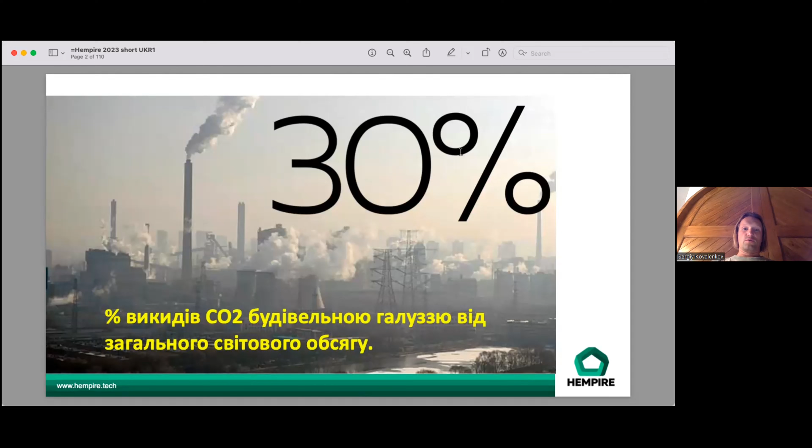Let me show you my next slide. 30% of CO2 exhausts are the responsibility of the construction industry. And this is actually the bottom line. Modern analysis says it is averaging 40. So you can say 40% of CO2 comes from construction. So the construction industry is very conservative and very harmful for our environment.

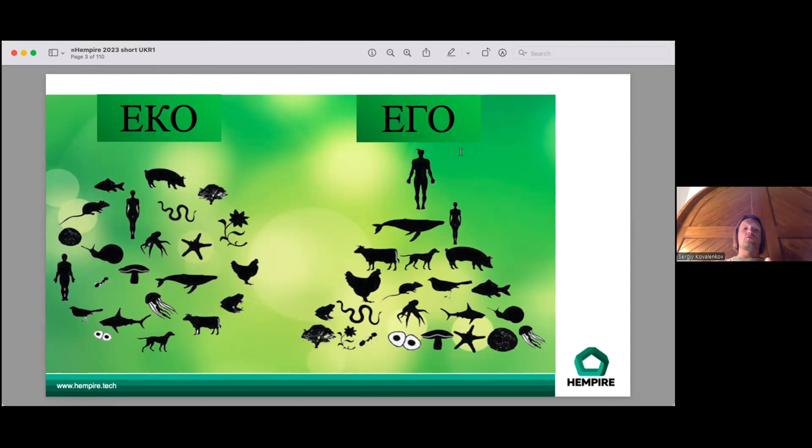We have a lot of problems here, not even challenges, but problems, because the person puts himself and herself on top of everything else that is alive on our planet. But this is not good for development. And in all textbooks on economics, all natural resources are shown exactly as resources, like timber in tons or oil in barrels. But you must understand that these resources are going to have an effect on the whole planet.

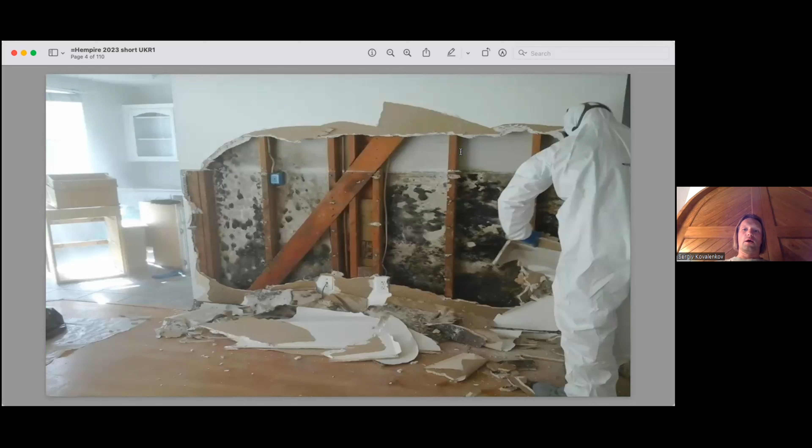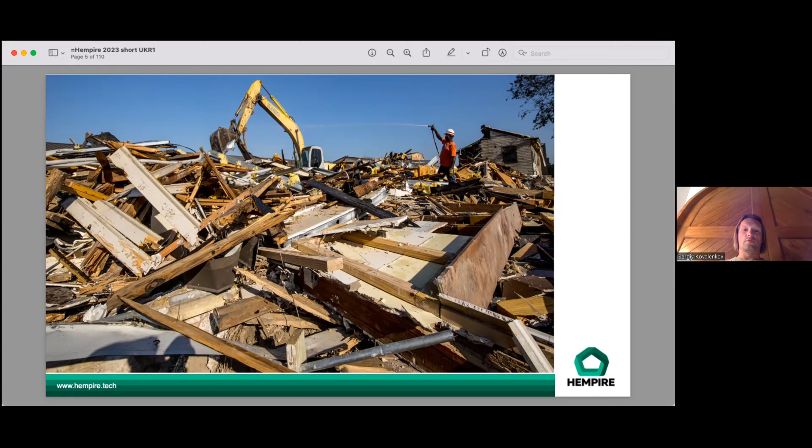So now we have so many materials which are easy to install and they are rather cheap. You see them here, but you need to understand that sometimes the planet suffers when we use cheap materials. 15% of all the construction materials do not comply with any regulations. Even the latest kind of materials brought to the construction site will be used only to the amount of 85%.

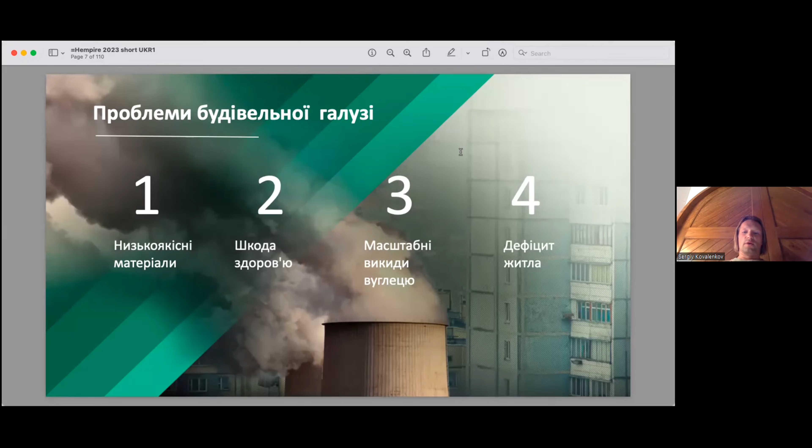15% will be simply thrown away, and the construction industry creates landfills, and we are producing low quality materials which are harmful for health and harmful for the whole planet. And this is the never-ending cycle. We are doing it again and again, and somehow we cannot jump off it. And what is the solution that we are proposing?

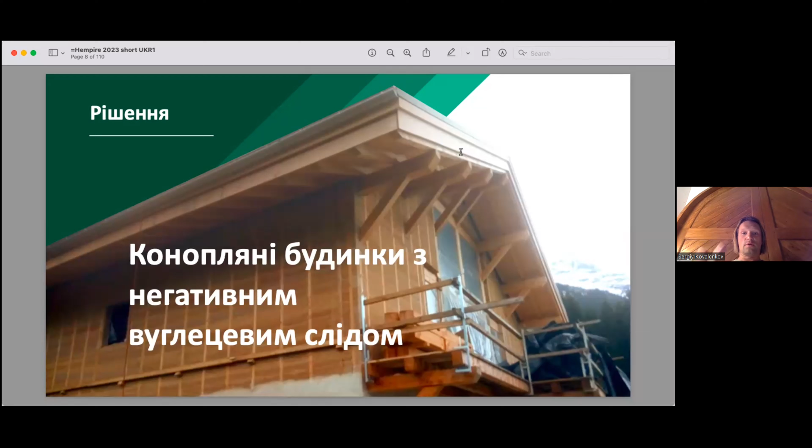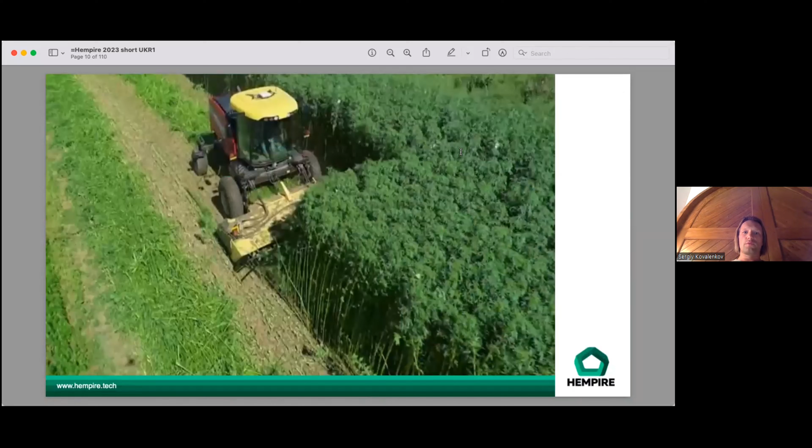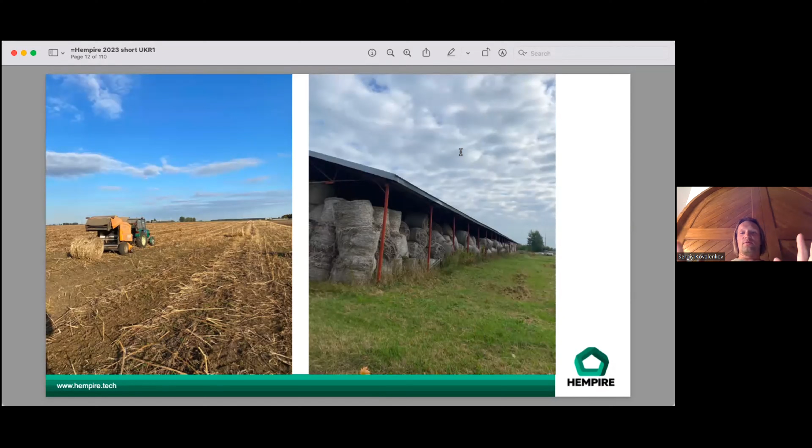We propose to build houses using isolation materials with negative carbon imprint, and I'm going to tell you what it is about. This is our hemp farm. This is how technical hemp is being produced. This is an agricultural crop which is grown like sunflower. Then it is harvested from the fields and taken to the facility.

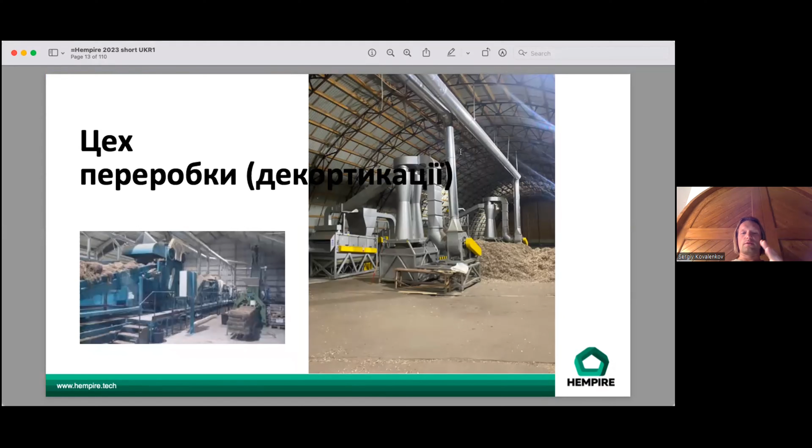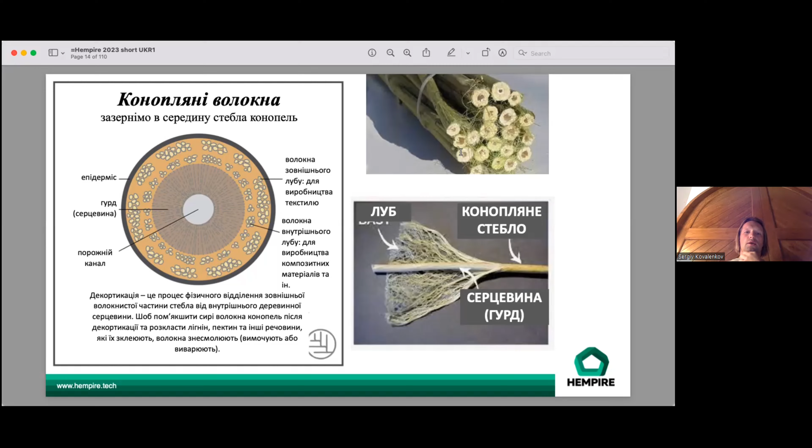And this is how it is being processed, decorticated. This stem is being processed to get two things from it. One is the fiber, which can be used to produce bioplastics, clothes, paper. And the inner part of the stem is very much like timber, and it is very porous too. And so we're using it as insulation material.

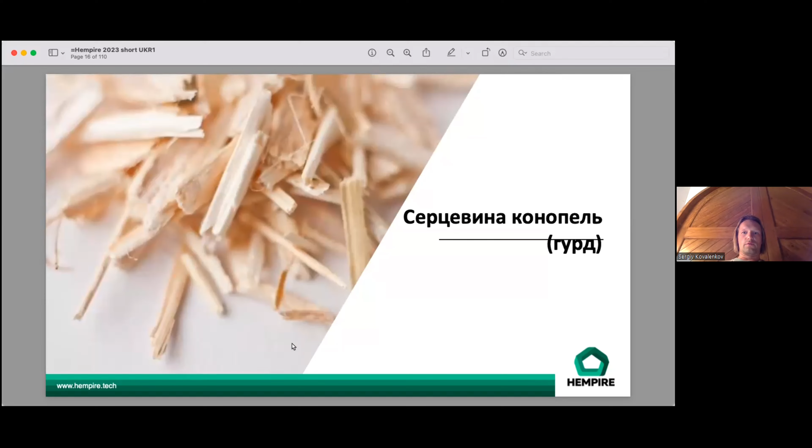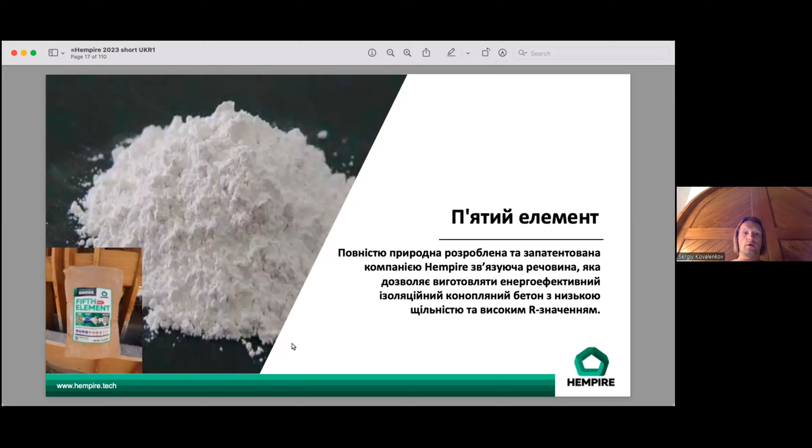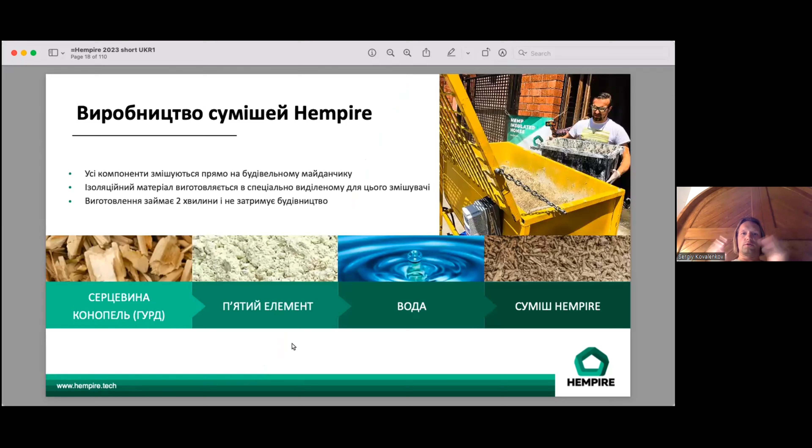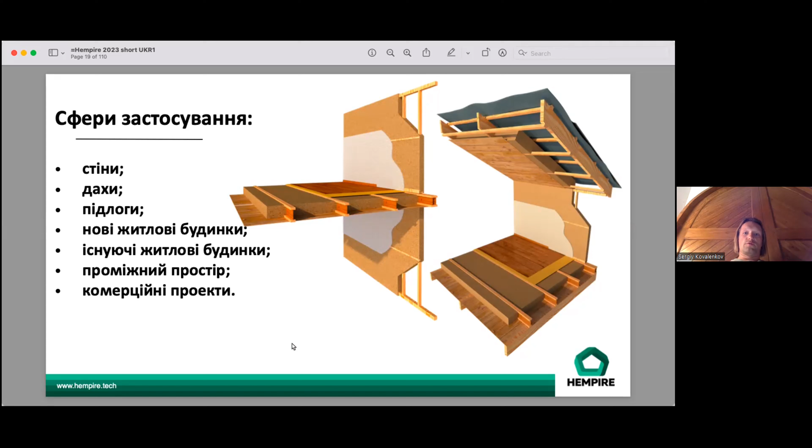We have used a construction lime to produce a binder, and this is our fifth element. So our mixture includes the hemp hurds, the fifth element, as we call it, the binder, and water. And the three elements are put together at the construction site, and this material can be used to build anything: external walls, internal walls, the roof. So whatever you need in a house can be built of it.

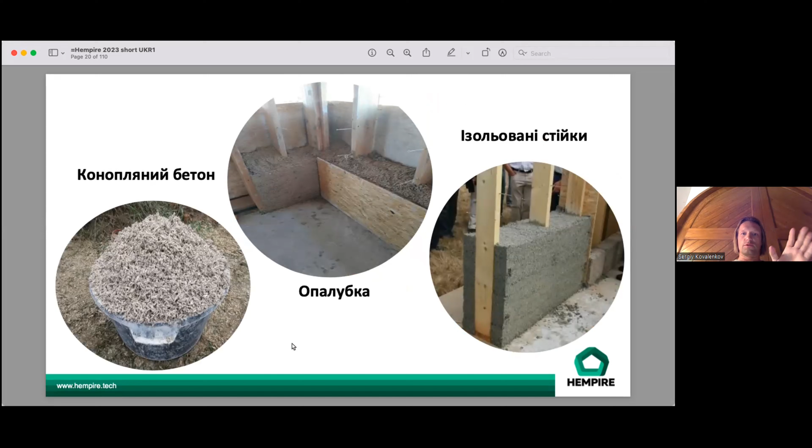So how this mixture, this insulation material works, hempcrete we call it. We make formwork, and then we fill it with hempcrete, and we can remove the formwork 1 minute after we finish pressing the hempcrete into it. And our hempcrete starts solidifying at once by absorbing CO2 from the atmosphere. When lime is mixed with water, it starts absorbing CO2 and it turns into limestone.

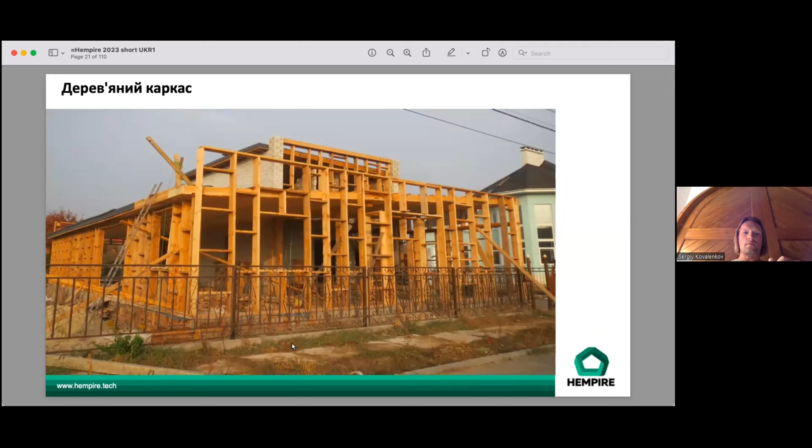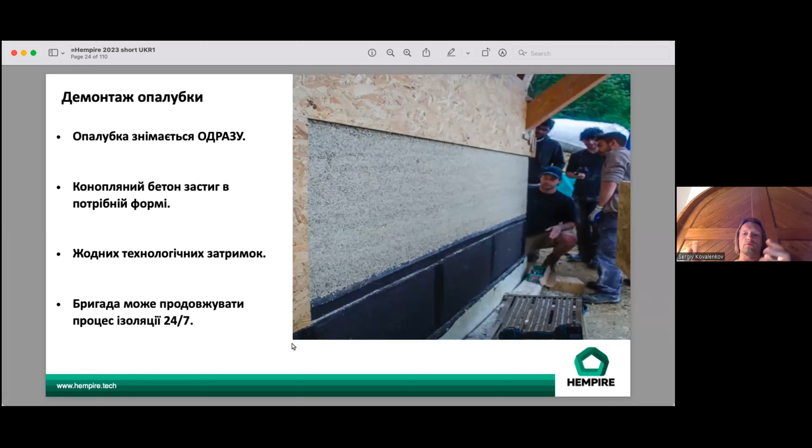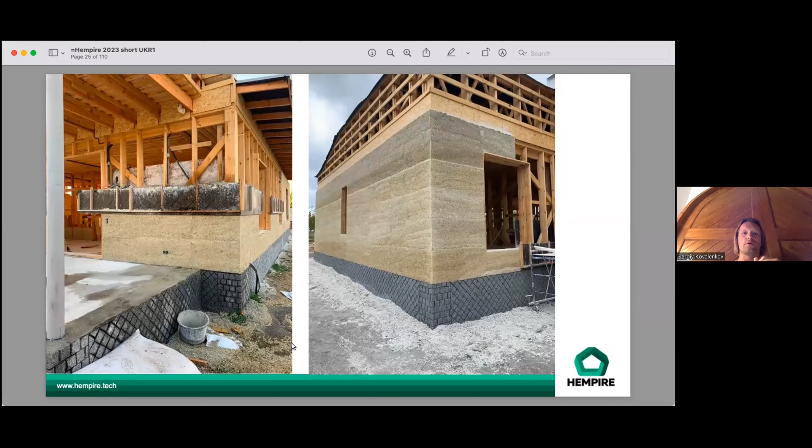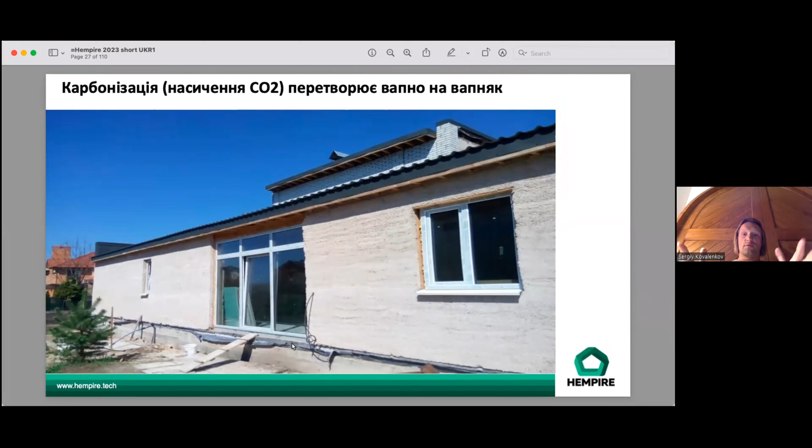This is how it looks. So we press it together very quickly and we get a material which is instant setting, and it keeps its shape very nicely, and we can use it to isolate any surface. We can select the necessary depth of the insulation material depending upon the climate, and we can isolate the whole building using this material, and it is a biodegradable material. We are using only Ukrainian produced

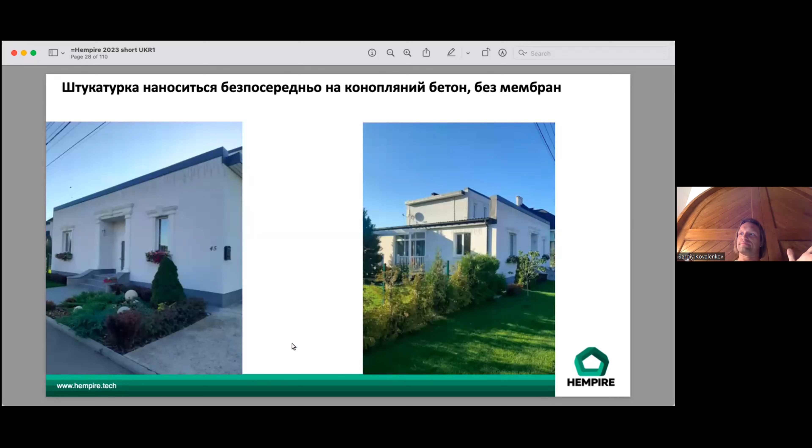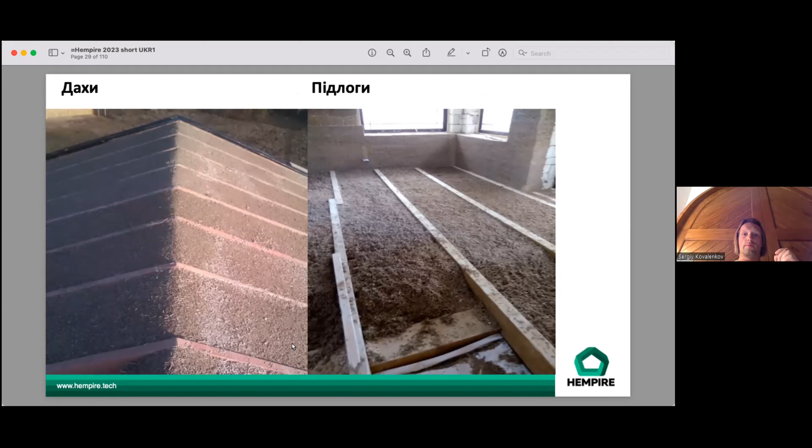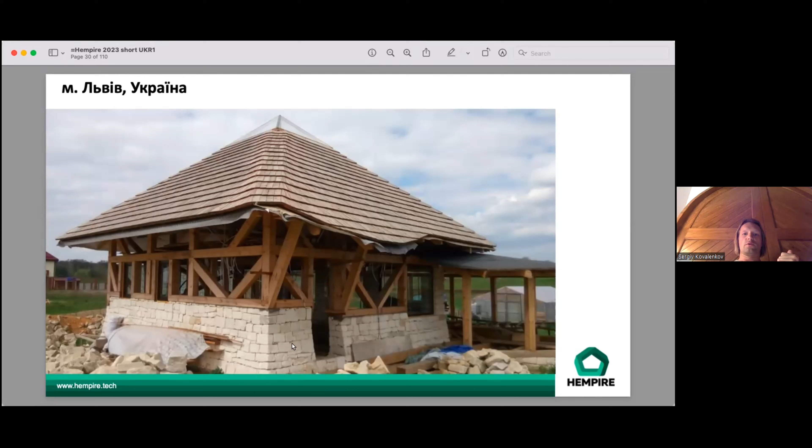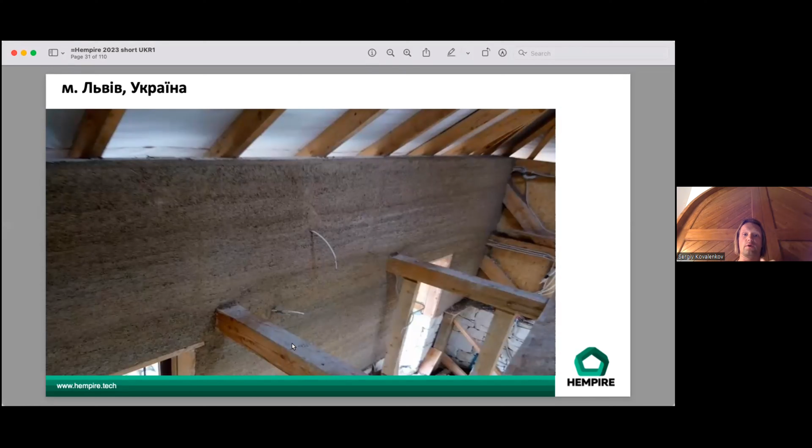raw materials. We can plaster this material on both sides, and if this material is used inside, once again, it is biodegradable, it is absolutely ecological, and it looks really cool, because 1 hectare of technical hemp can absorb during 4 months of growth up to 15 tons of CO2. So when we produce something of hemp, we are doing a very good job because hemp absorbs CO2 very nicely, so it reduces the carbon print of the building industry very efficiently.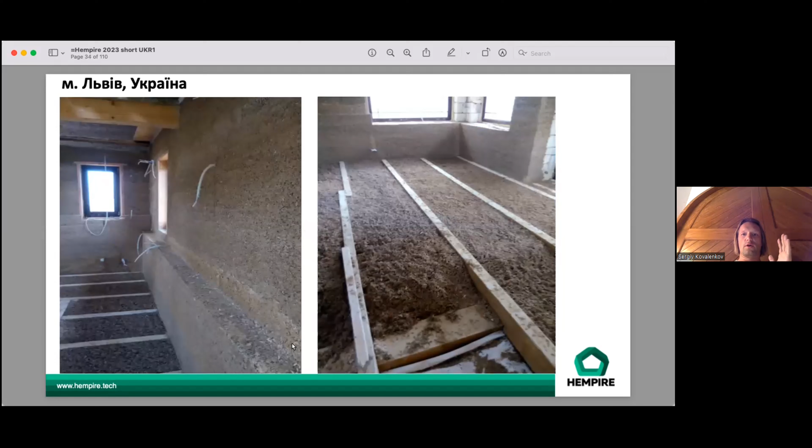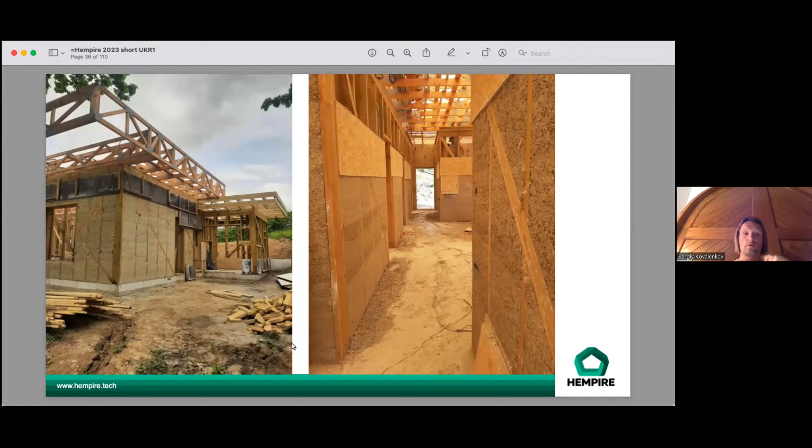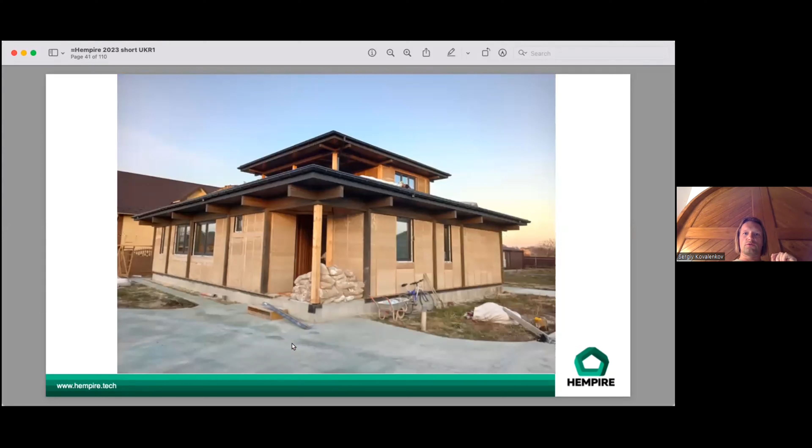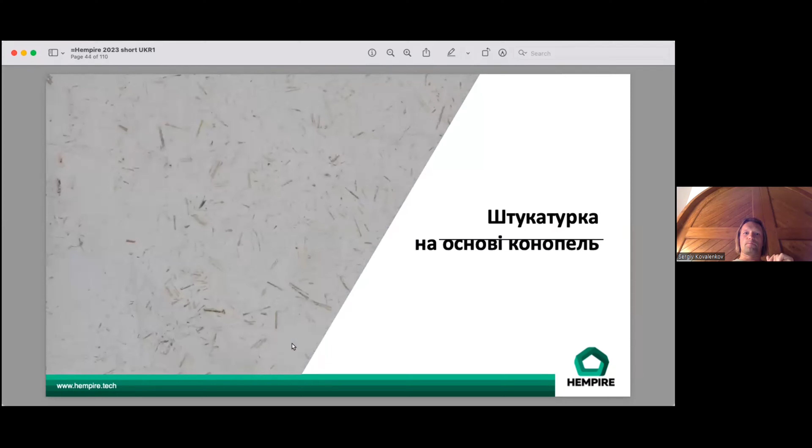So we are actually absorbing more CO2 than we used to produce, and we can use hempcrete to substitute OSBs and all the stuff. So hempcrete is absolutely natural. It is non-toxic, and we have already built or isolated more than 80 buildings in many countries of the world, in Ukraine, in the USA, in France, and they look really cool. No one can say that these are houses built of technical hemp. We also have a few variants of plasters on the basis of technical hemp, and it is really cool.

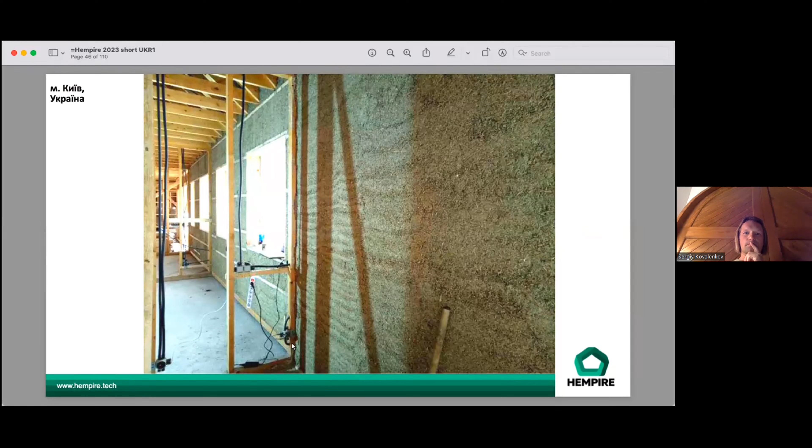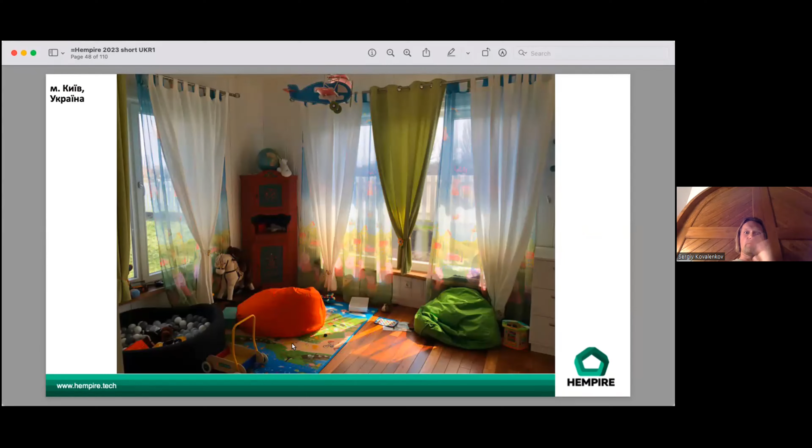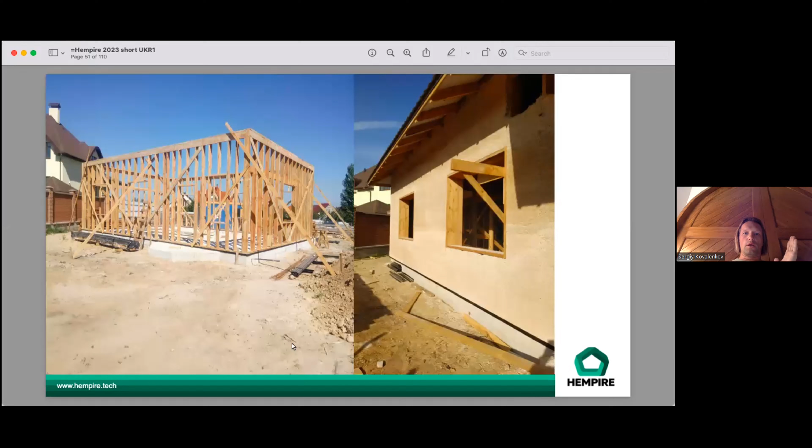The major thing here is energy efficiency. So here we have an in situ kind of material which has no freezing thermal bridges, and we can shape it the way we like it. We can work with any kind of shape, and now I'm going to show you this building.

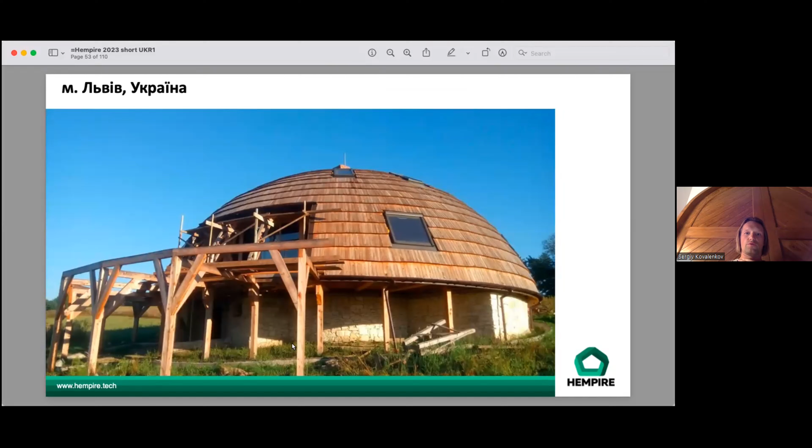The owners wanted to build another house next to Kiev, over 100 square meters, and people were not living there, and for thermal they had to pay only 400 hryvnias, imagine, during 1 month. And so this big house is much more energy efficient than a small house, which will give you a huge bill.

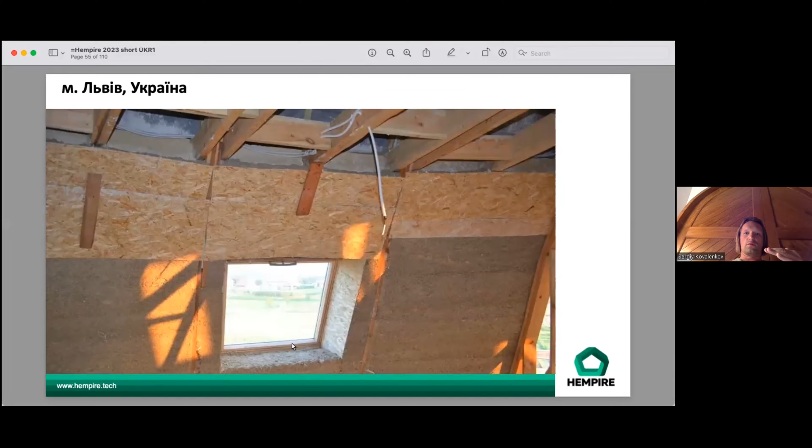Of course, also we can regulate moisture. And this is a really cool indicator because the moisture.

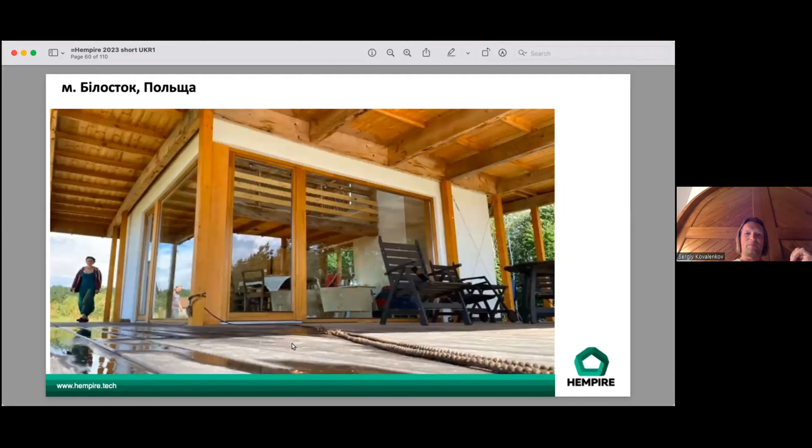Excuse me, please. I understood it was a question, but please write it in the Q&As. And our speaker says that I will be very brief. I understand I need to finish.

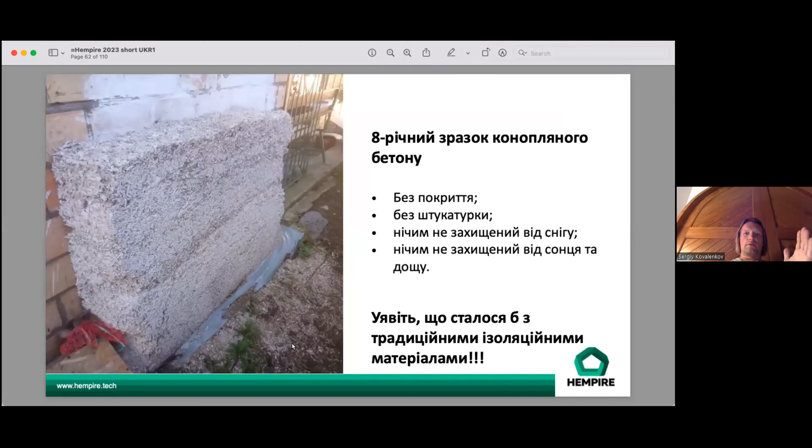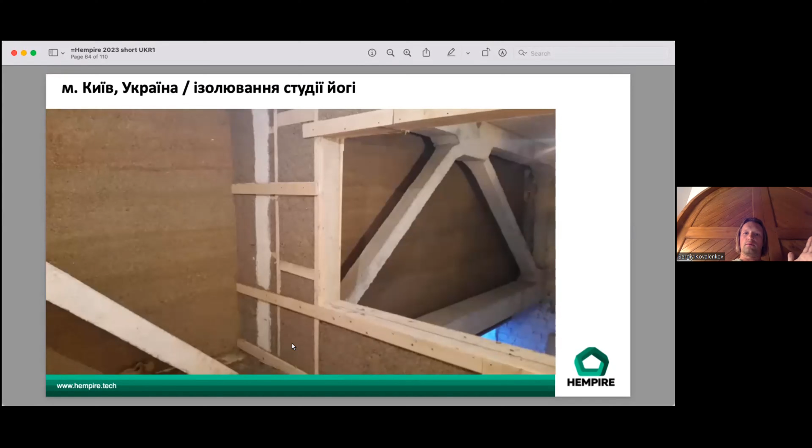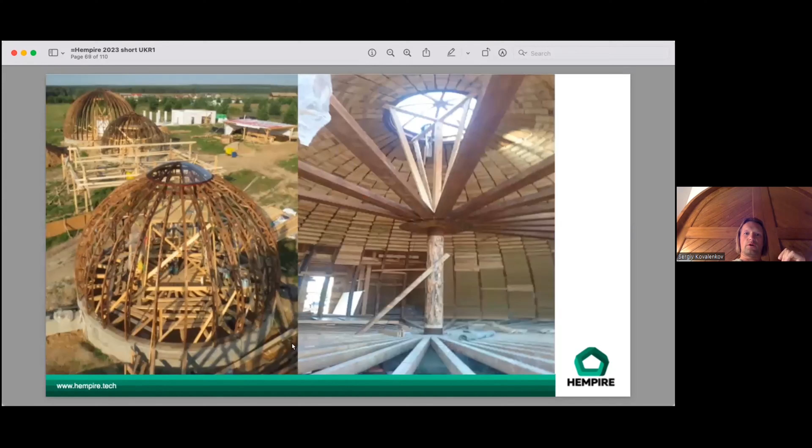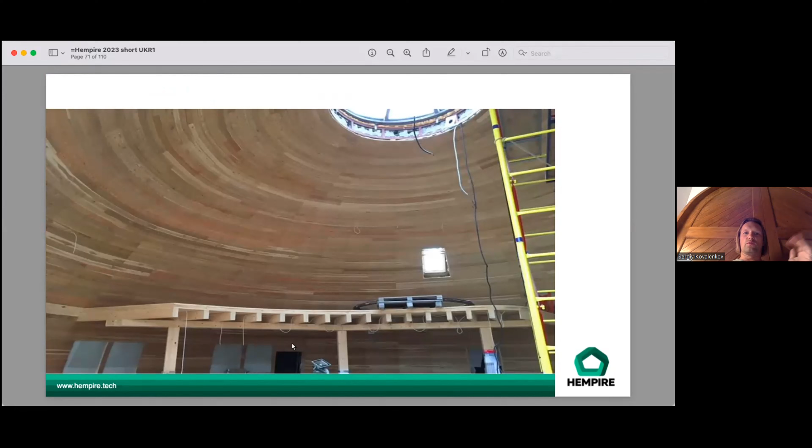So this hempcrete is not afraid of moisture. It is fire resistant. We had a lot of testing done, and we could see during all these years that it is really working. And at present, I would like to show you a yoga studio. We became the first company in the world to build such houses, cast in situ, I mean, of hempcrete. So it is a source of inspiration for all architects. You can shape your project the way you like.

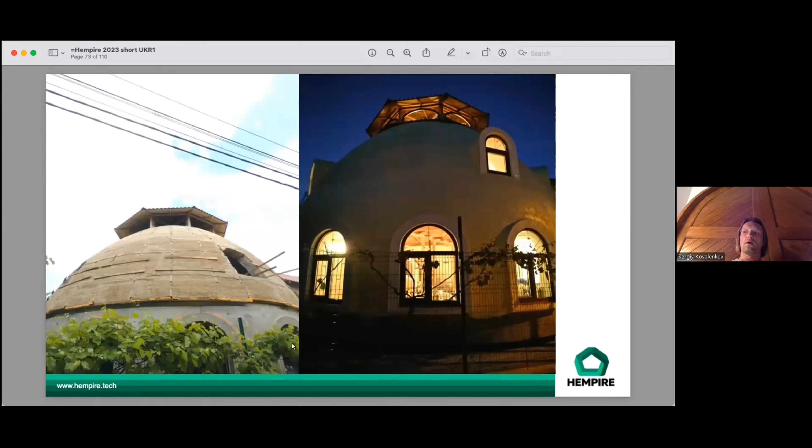And this is the house that was built by the owners. We simply trained them and they built their house themselves. We provide quite a lot of trainings.

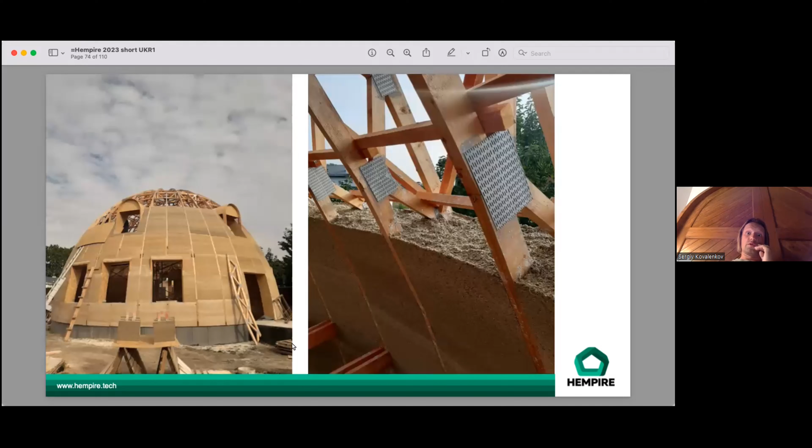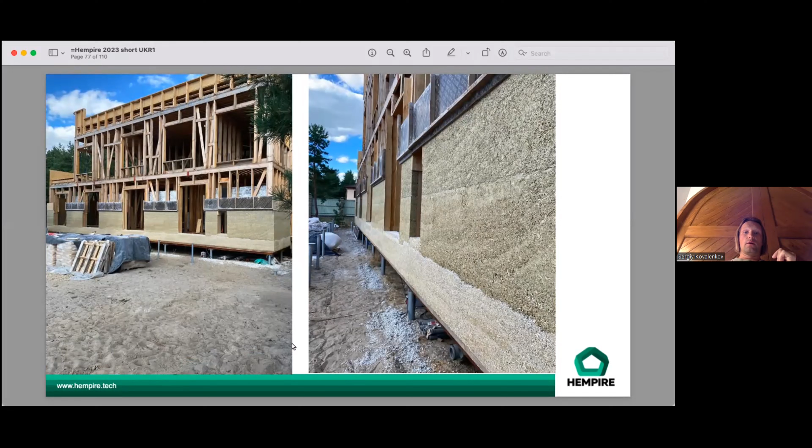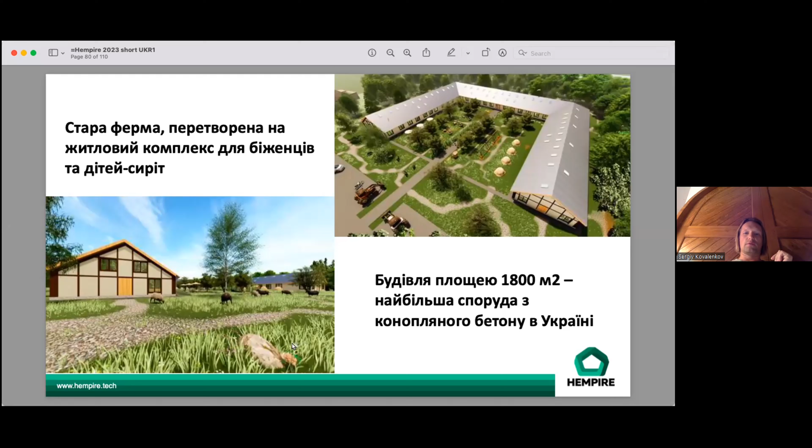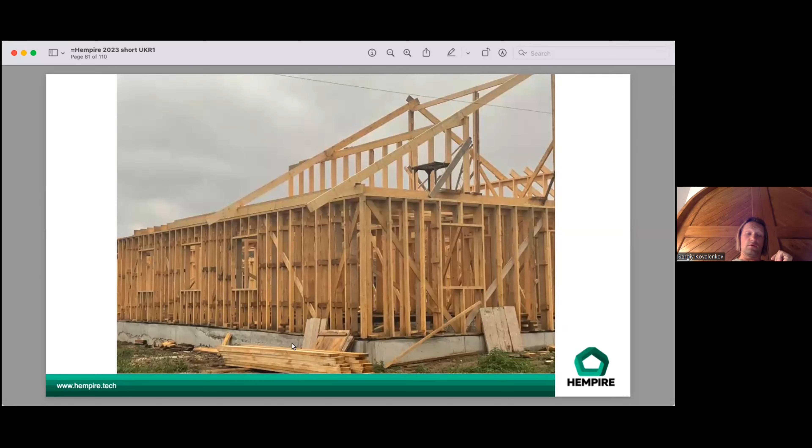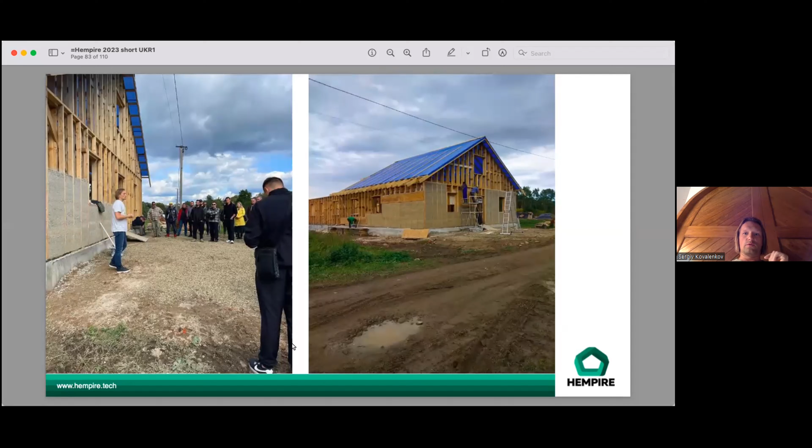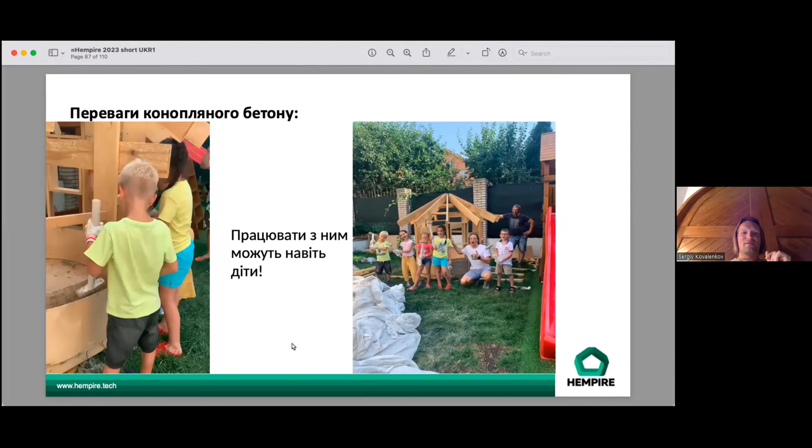And so this will be a complex housing 30 families. And these are the pictures from last September. We got investment for this. And the next building we're going to build is a community center for veterans. So we are working a lot with hemp. We can see a lot of advantages. We were even making trainings for children in one of the private schools in Kiev.

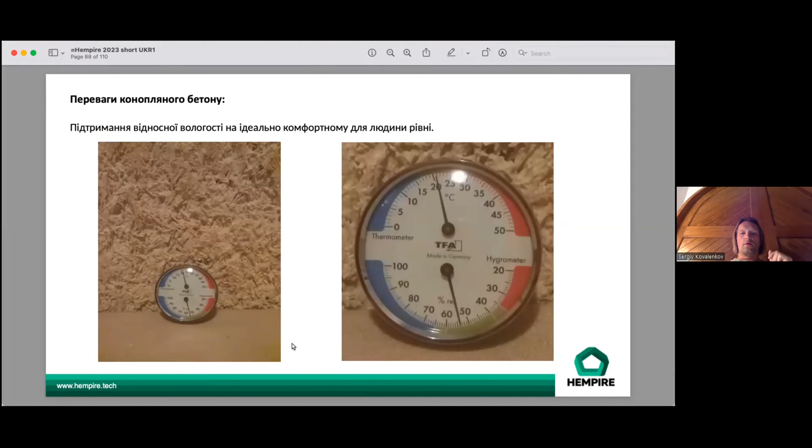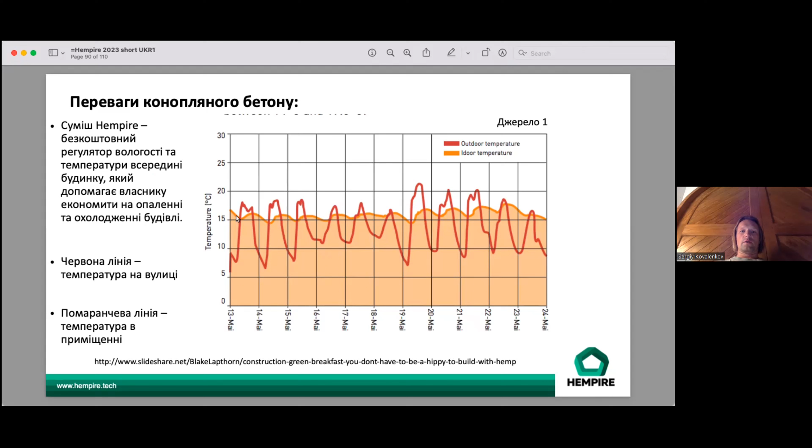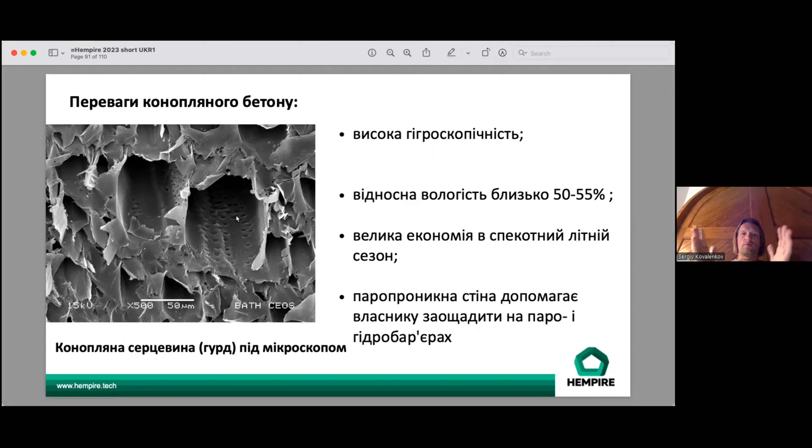So the same goes for temperature. You can see the red line showing outside temperature, the orange line showing the inside temperature. You can see that the difference makes 2-3 degrees, and it helps energy efficiency a lot. Why? Because this hemp, if you look at it under the microscope, is a very porous material, and we have micro and macro pores, and so we have houses which are built only of natural materials, building the walls of hempcrete.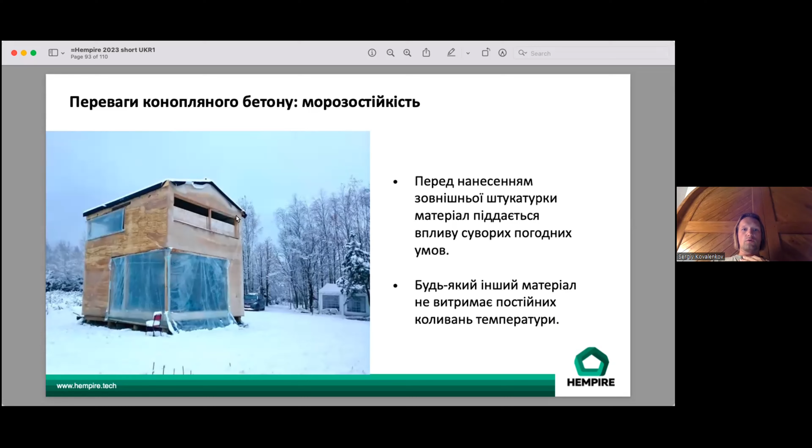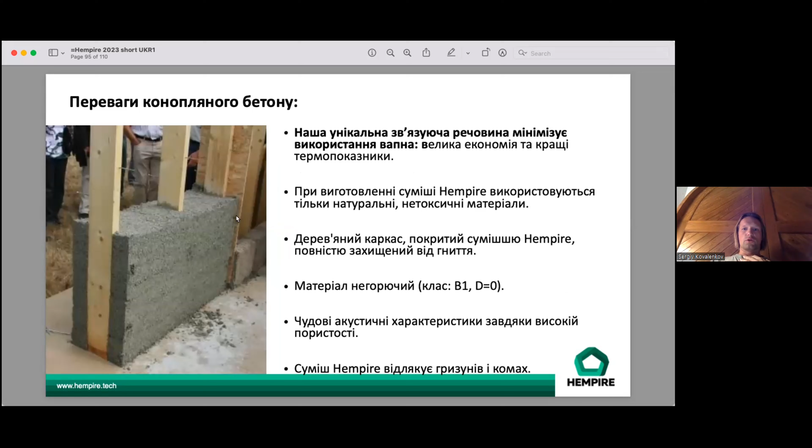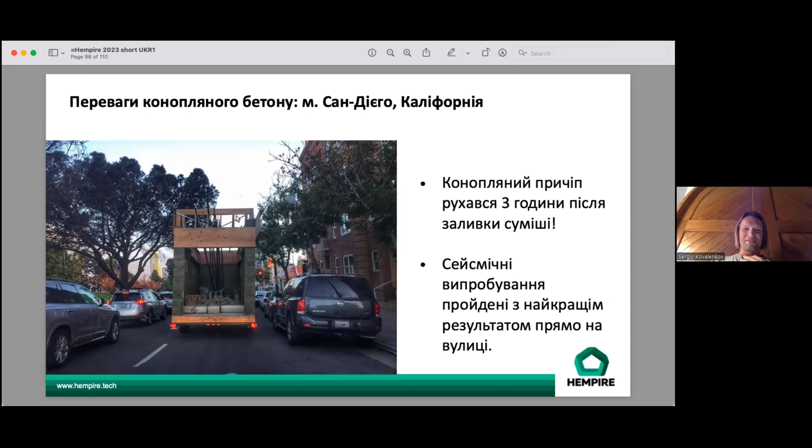And you can also see that it is frost resistant. We can keep it like that through the whole winter. Also, it is very economical. It is fire resistant, and it has very good sound absorbing qualities. So here you can see a hempcrete house on wheels, and this was the first hempcrete house on wheels in the history of humankind.

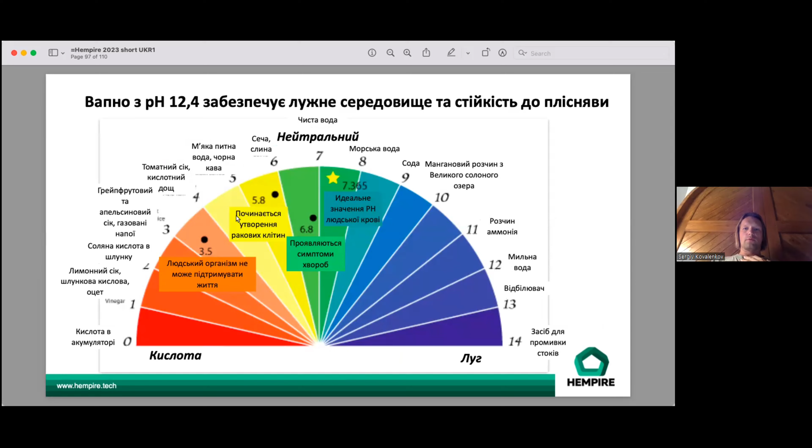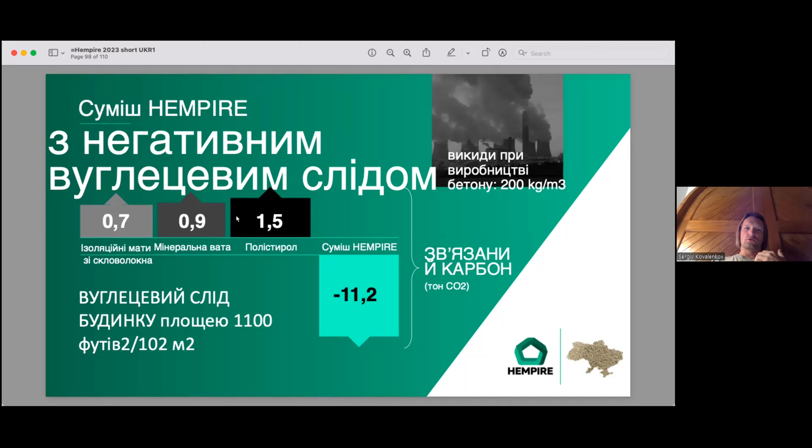And it is cool that the pH factor is 12.4. That is, we prevent mold naturally. So the environment created by this material is alkaline, and so there will be no mold in your house ever. And also, if we compare it with polystyrene, with mineral wool, it is much more beneficial in terms of environmental benefits.

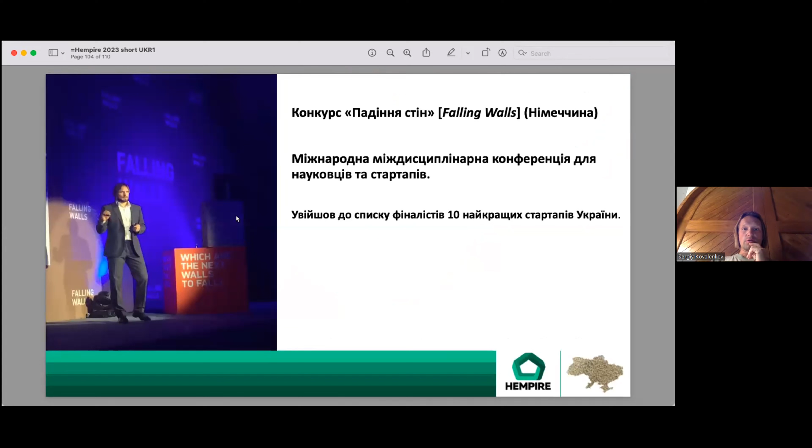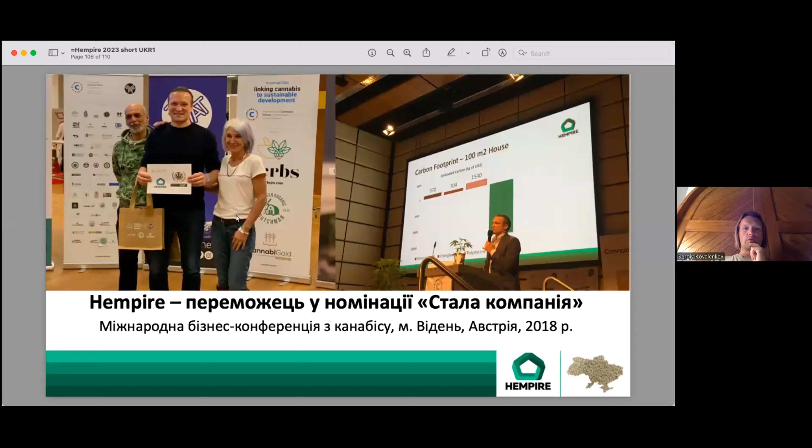And also we've won quite a lot of prizes, quite a lot of grants, everywhere across the world. We are moving all over the place. And the American Association of Hempcrete Builders also believe that they are going to adopt special legislation in the US, and they are going to legalize building hempcrete houses.